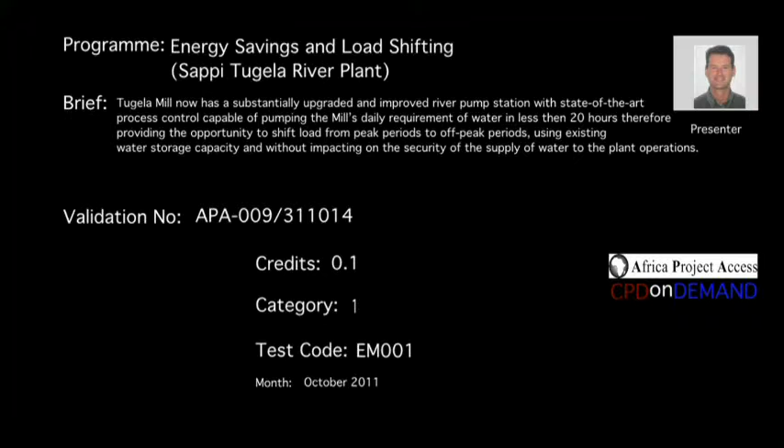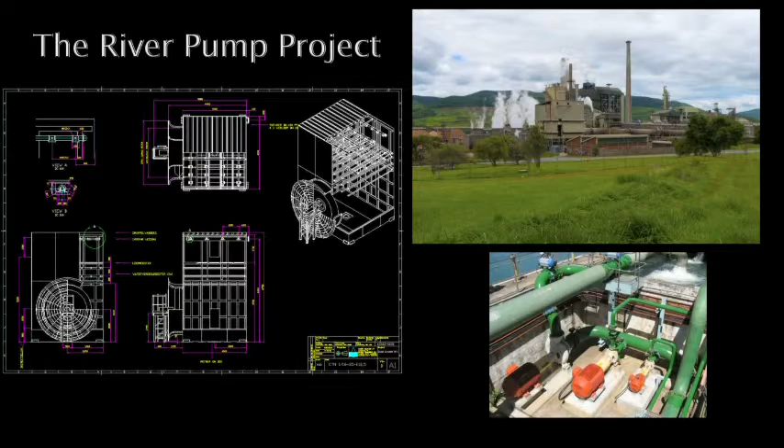We call it internally the River Pumps Project. This pumping station supplies water to Sappi Tugela's mill - it's the lifeblood of the mill. So every time we were messing around with this plant, it was obviously very risky and a lot of pressure on us to make sure we didn't bring the mill down.

I'm going to go through the project beginnings, how it started, the investigation, the process. I'm going to try and explain how the plant works. It's not that complicated, and I think it's a bit more interesting if you understand the plant, and then the detailed investigation procedures, and then our findings and solution.

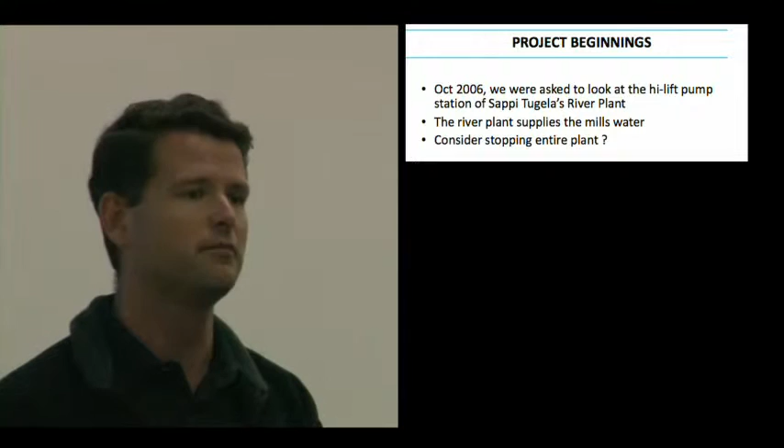The project started in October 2006. We were asked to look at the high-lift pump station at Sappi's Tugela mill, a river pump plant. The mill at that stage was thinking about upgrading the impeller on one of their high-lift pumps. So that's where we started off, and we walked into this plant with that idea in mind.

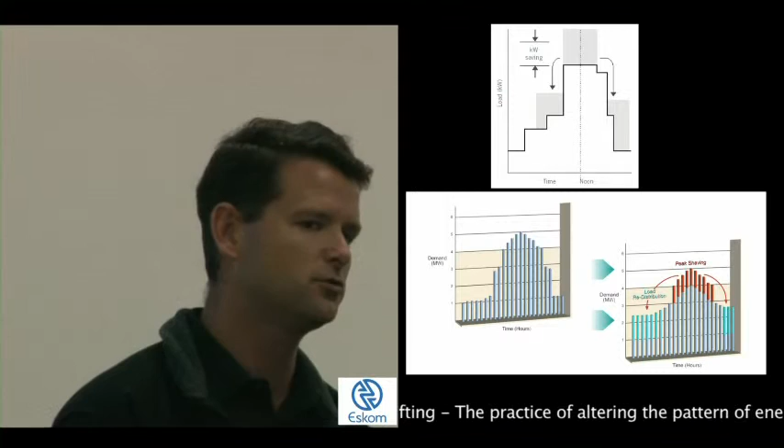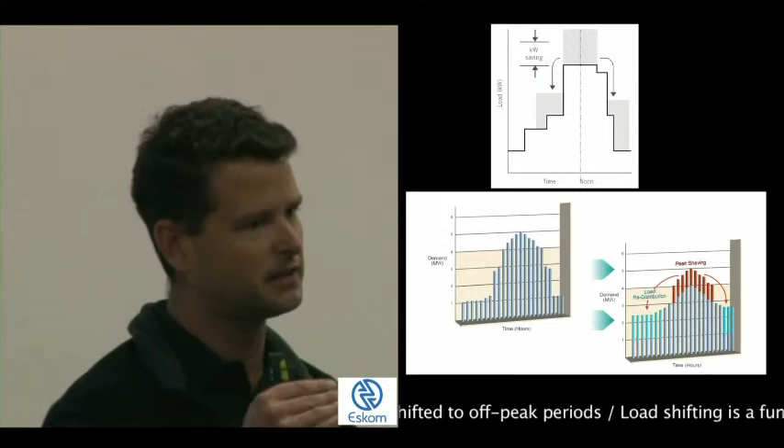One person suggested - and just to go back a bit - Eskom had all this load shedding issues floating around, and Eskom was funding load shifting projects. For those who don't know, load shifting is when you switch off a plant during peak periods of the day so that you can counteract the peak on the grid. That's because everyone goes home and switches on their stoves and geysers, and Eskom has this peak they struggle to handle. So the idea is to switch off plants during that period to counteract that grid peak, and Eskom was funding those type of projects quite heavily and pushing for them.

But anyway, we proceeded. We went to meet the personnel in the plant. The first thing I got told: there's no ways you can stop this plant running 24 hours a day, flat out. The water quality changes overnight - there's no way of knowing what's going to happen. The turbidity suddenly can go as high as 10,000 NTU. You can't process it, we can't keep up with the mill, we struggle. You can't stop the plant.

We proceeded anyway. Started gathering production data, power consumption data, equipment data, capacities. We even did a GPS survey of the plant because physically it's laid out over a fair area, and there were no detailed drawings showing the heights of the various pieces of equipment. So we did a GPS survey to figure out static heads and pumping heads.

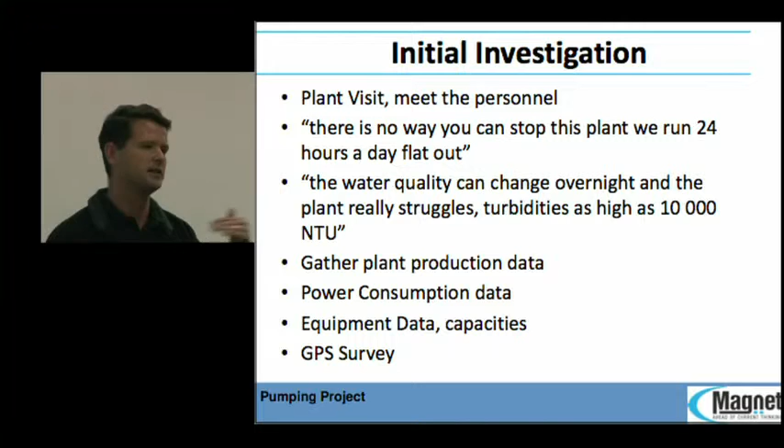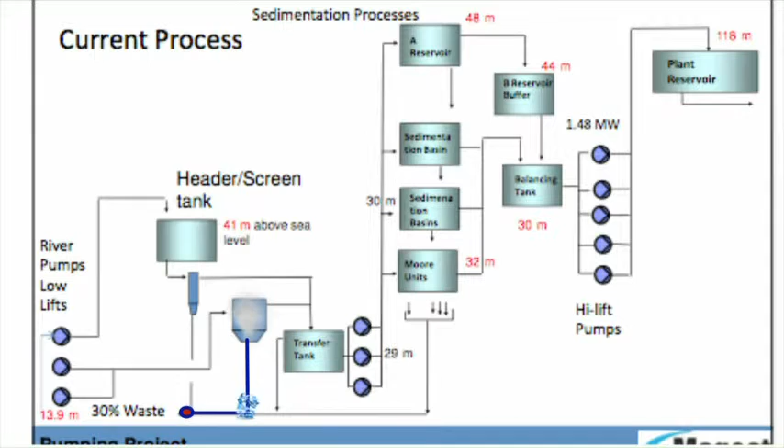This is the original plant configuration. Pumping from the river, about 3 parallel pumps up to a header tank that goes down by gravity to some cyclones, separating out the heavy waste that comes from the river - obviously there's a lot of stone and grit and stuff that has to be removed. The accepts from that go into a transfer tank, and parallel to that there was another what they call a grit chamber.

Then they process the water through the rest of the plant, going through basically sedimentation processes, where in principle you're just allowing the dirt to settle out and the accepts overflow and proceed forward through the process, then it gets pumped up to the mill. Looking at the static heads, we're starting at sort of 13.9 meters above sea level, up to 40 meters, and up to 118 meters above the plant, up at the mill.

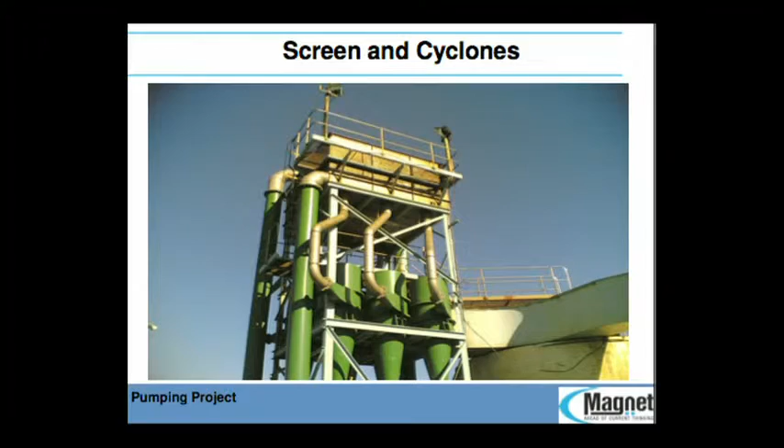In picture form, this is suction from the river. Those are the 3 pumps drawing from the river up to this chamber on top, which is like a header tank. These are the cyclones. There's what's their own homegrown centripetal grit chamber - they made this themselves because they didn't feel like buying it from anyone, so they designed that themselves.

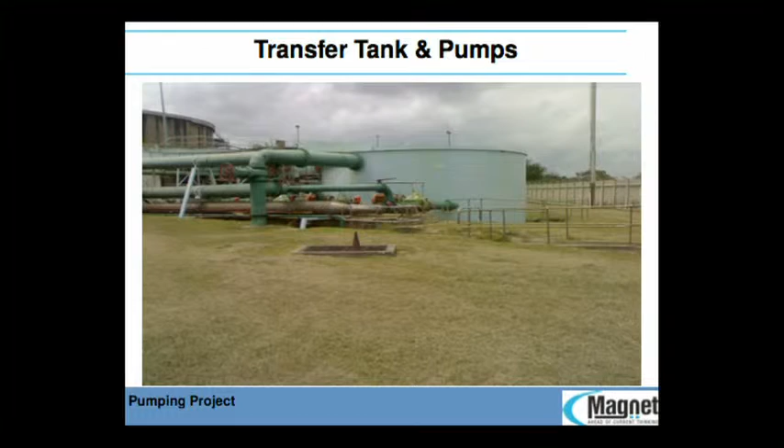There's the transfer tank, 3 original pumps in parallel. Here's the sedimentation basins - that's got the highest throughput of all the various sedimentation processes they've got there, at plant level, there's 2 of those. These are what they call the Moore units or clarifiers. What historically happened with this plant is they started off with the sedimentation basins, then they needed a bit more capacity, so they added something else, and every time they added something else, the technology had changed, so we were adding a different piece of equipment.

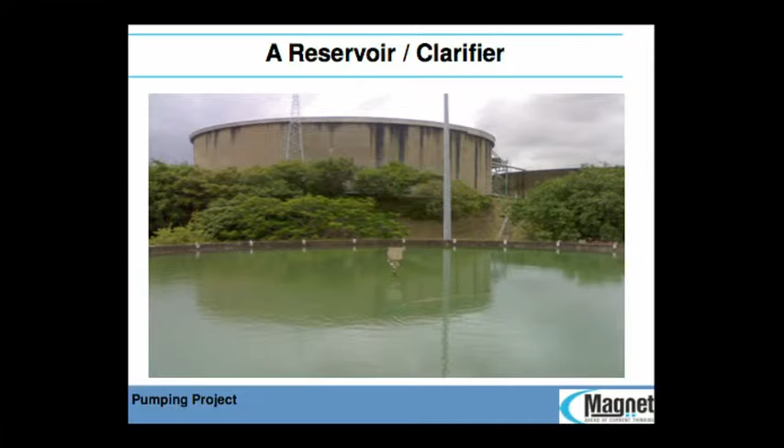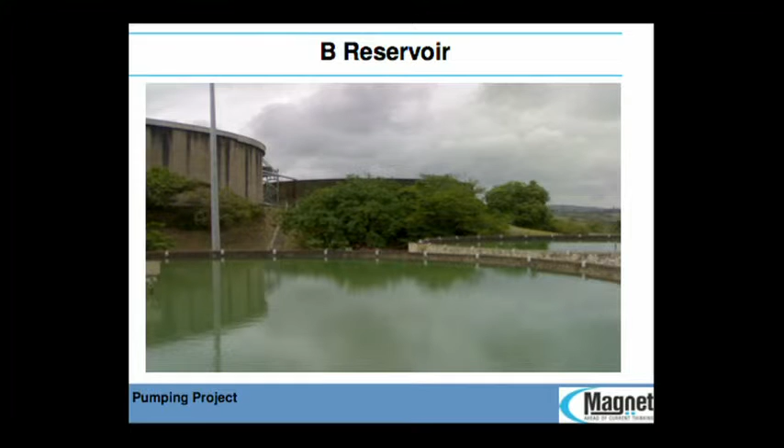And then that's the A reservoir or clarifier, which is a typical, more modern design clarifier. It overflowed from the clarifier to what they call the B reservoir. I think when they did the original project, they put in another big reservoir which could be converted to a clarifier in the future, and that B reservoir was a key part of this whole project - we were quite lucky that it was there.

From all those sedimentation processes, all the clean water flows into their balancing tanks, and then it's pumped by these 5 parallel pumps up to the mill reservoir.

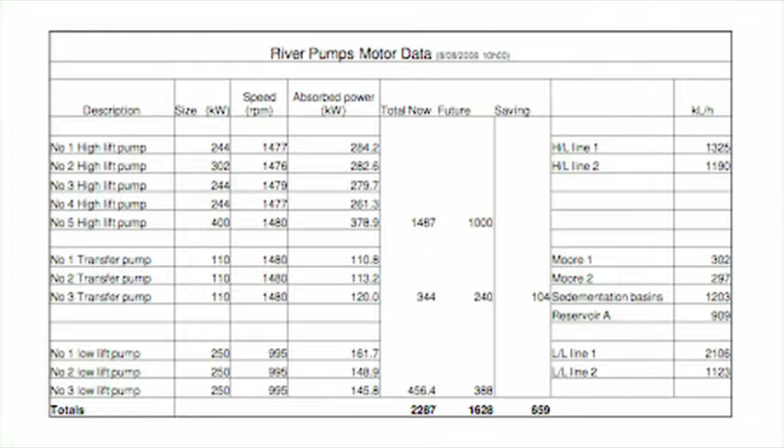This pumping section draws about 1.48 or 1.5 megawatts of power. The whole plant runs at about 2.2 megawatts.

One of the really nice things about this plant is, Gordon was talking about defining your scope and area of analysis. It was obviously quite easy for us because we had this whole pumping station that's supplying the mill. They had already online monitoring for the power being used in this plant, and it was very stable at around 2.2 megawatts.

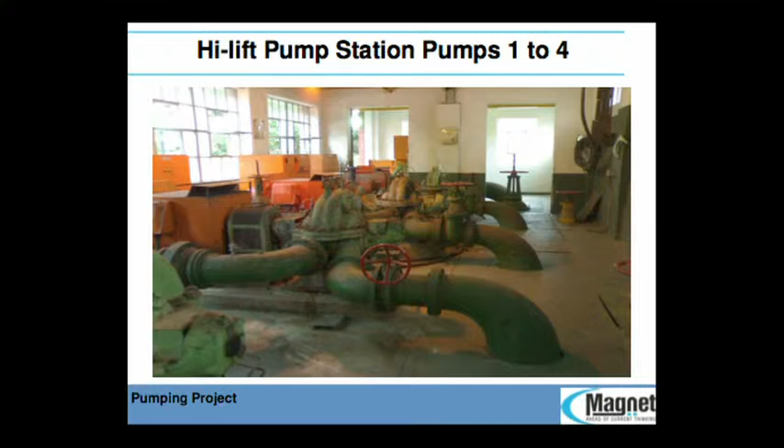That's the high lift pump station. These are the original pumps that I think were installed in the 1960s sort of area. And then they had one newer pump, a Sulzer pump, that's actually a 400 kilowatt motor, 6.6 kV. That pump has got a much larger capacity than those other 4 pumps, individual pumps.

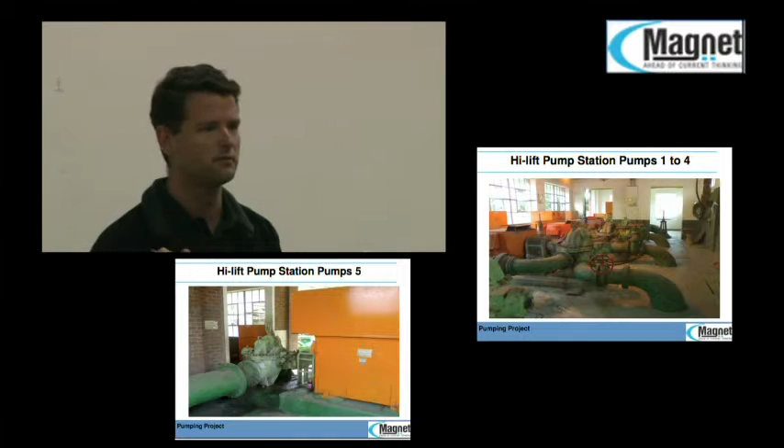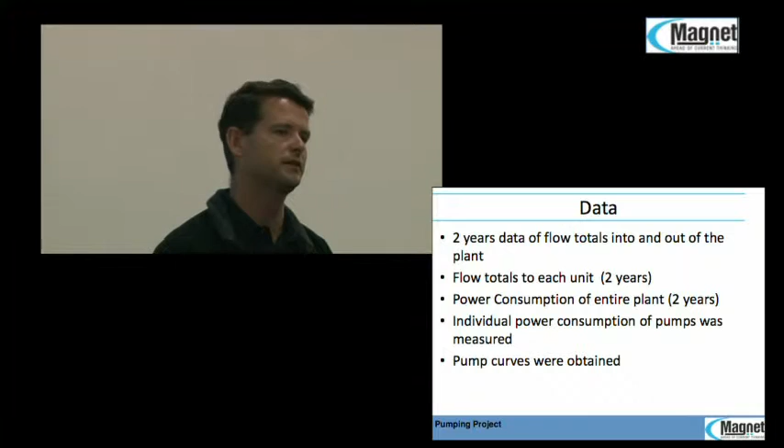What data did we collect? We got 2 years of data, flow totals into and out of the plant. We had a whole lot of log sheets from the plant personnel, recorded daily, and it actually was very useful to get that data.

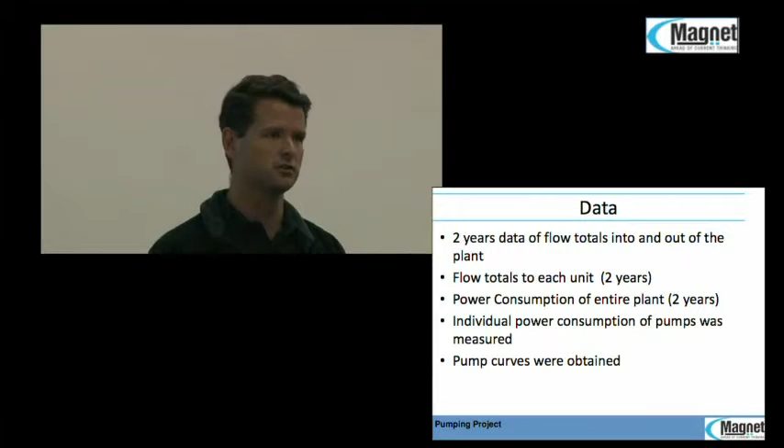We inputted that into a whole spreadsheet system, so you can analyze trends at different times of the year. How much water are they processing when the river turbidity changes? How does the river turbidity change? You've got these mental pictures of overnight it's shooting up, and then the next day it's fine, and all these sort of things. Flow totals into each unit.

We obviously, in the back of our mind, we're thinking about, if we switch this plant off, can we now catch up once we've been off for 2 hours and supply the mill? One of the key parts of this project is you've got this plant reservoir that supplies the mill. So the whole idea is that if you can stop this plant, have you got enough storage capacity over there to keep supplying the mill while you stop the plant, and then you've got to catch up.

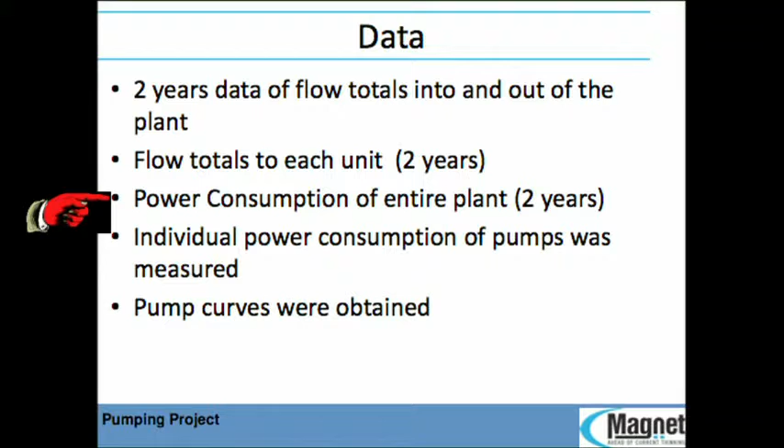So we've got flow totals for 2 years. We started looking at the power consumption of the entire plant. How does it change? Then you start getting more detailed individual power consumption of each of the pumps. Get all the pump curves, dig those out.

Did a mass balance across the whole plant for different scenarios. When the water's dirty, how much water can you put through each of the processes? When the river water is clean, and then effectively it boils down to, in summer, how much can you process in winter, and what's the average?

So what did we find, to summarize? Plant produces about 600 liters of clean water every second to supply the mill. On average, 30% of that water was returned to the river, irrespective of the time of the year.

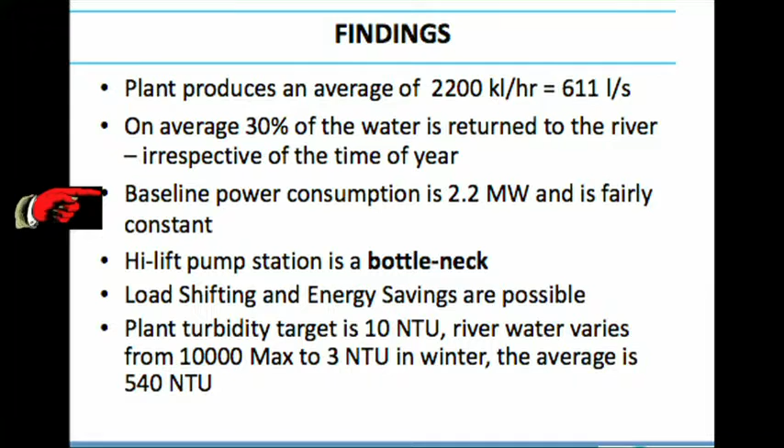Baseline power consumption was 2.2 megawatts, and it was very constant, which was great from an M&V perspective, because now you're starting with something constant.

The high lift pump station was a bottleneck, so if we wanted to stop the plant, we did not have enough pumping capacity to catch up in the 2 hours that we wanted to stop, and maybe even the 4 hours, because peak periods are from 7 to 10 in the morning and from 6 to 8 at night, when you're suddenly paying sort of double for your electricity. So it's very cost effective to stop if you can during those periods.

The load shifting and energy savings were possible, and I'll go into that in more detail. One of the key sort of scary factors of this is, if you're stopping this plant, how much can you process once you catch up, and what's the river plant turbidity doing?

Now, the target of turbidity for the plant pumping out to the mill and to various other users was 10 NTU. The river water varied from 10,000 at the peak worst summer flood situation down to 3 in winter. So suddenly you see, now when you start looking at those trends, you say, well, in winter we've got a turbidity of 3 from the river. You literally don't even need the plant in winter.

You can pump it straight up to the mill. That's how clean it's coming out of the river. The average was 540. So now you start getting a feeling for, well, you're actually operating in an average region far less than the scary 10,000 numbers that they're quoting to you.

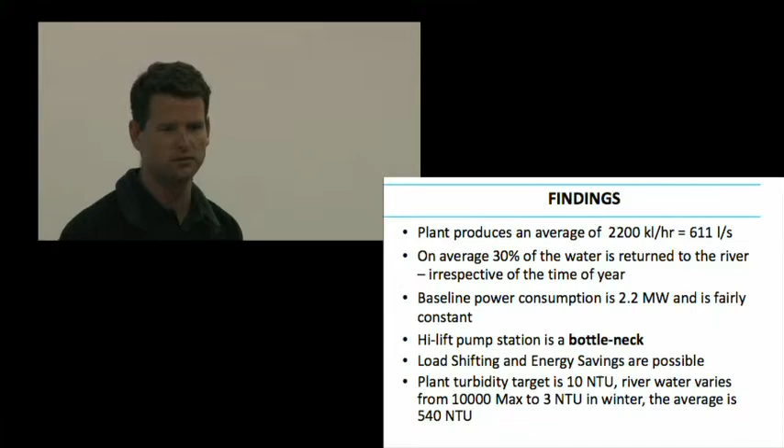It gets more complicated, like all projects, when you start digging into it. The high lift pumps actually supplied quite a few consumers.

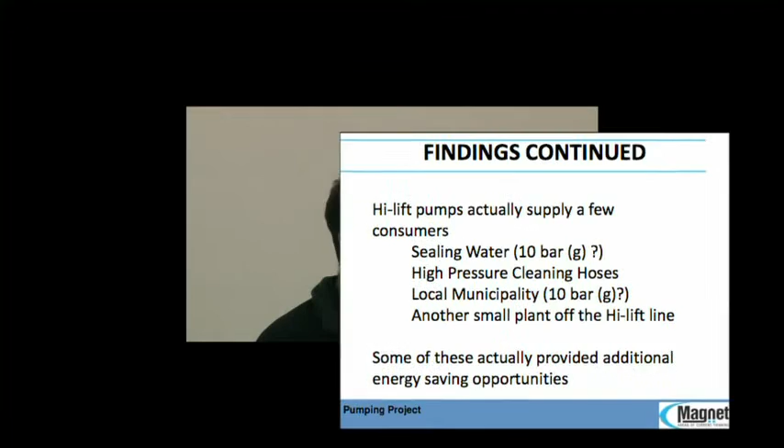After a while in the plant, we started talking, and I suddenly realized, wait a minute, where's the sealing water pump? Actually, the high lift pumps, which are supplying the mill at about 100 meter head to get up to the mill reservoir, were also supplying sealing water to all the pumps in the plant. So now they had 10 bar sealing water.

First thing is that there's obviously an energy saving opportunity here, because you don't need 10 bar water for sealing. But also, if you switch off your high lift pumps and you're not switching off the rest of the plant, you've got no sealing water.

They also used the high pressure, 10 bar water from the high lift station for cleaning. So now if you switch off the high lift pump station, you've got no cleaning water.

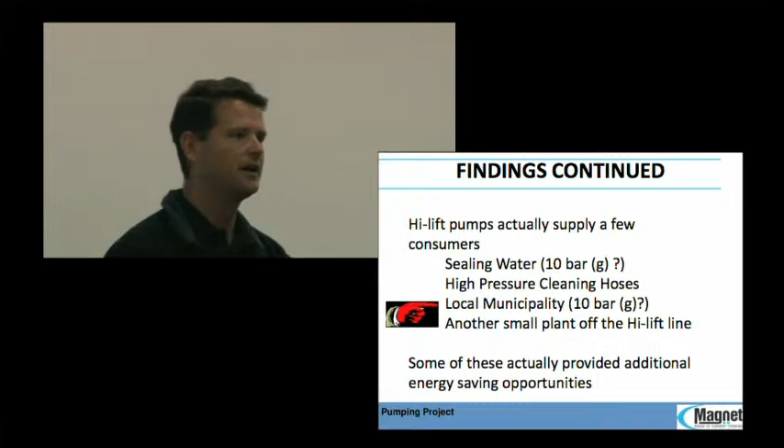They also supplied the local municipality with 10 bar water. And when I say the local municipality, this is like a little water processing station that then pumped across the river, and it was situated about 5 meters above the plant next to it. So you've got 100 meter head water supplying a back pressure of half a bar.

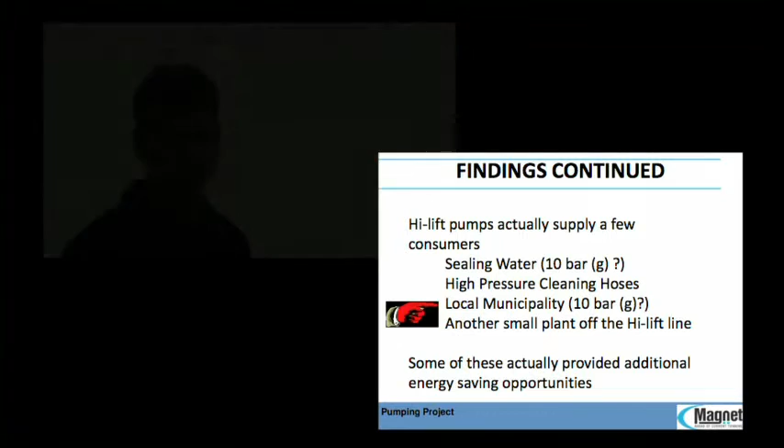The final complication that caught me up right before I was about to implement the project and get going was that I discovered there was another small plant right next to the mill that was drawing off the line supplying the mill reservoir, and that was a separate production entity altogether. So if we stopped pumping into the mill reservoir, they wouldn't be getting any water, and I'd literally be bringing down another plant.

And that was sort of mentioned to me as an afterthought right at the end. Oh, by the way, they're also drawing off the high lift line. So it gave me quite a fright.

But now all of these situations, this project's a little bit more interesting than just purely energy efficiency, because now you're juggling load shifting and energy efficiency, and what you have to do here to enable load shifting is often also an energy efficiency opportunity.

And it was actually quite complicated getting funding out of Eskom, because differentiating what's load shifting and what's energy efficiency is quite tricky.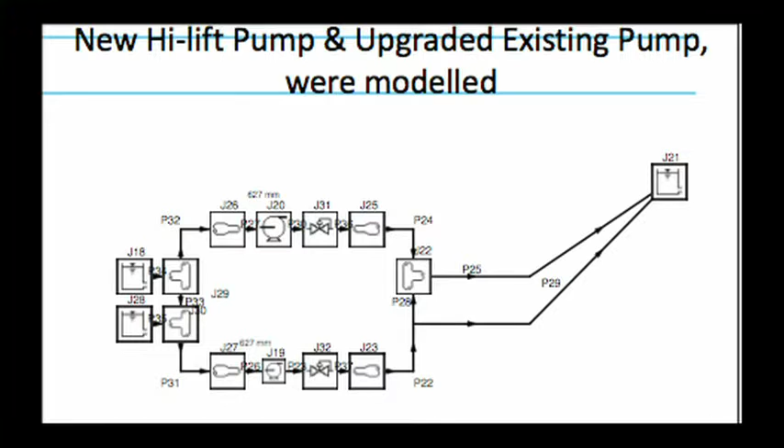We sort of predicted that in future, if we were to upgrade the one high lift pump and install a new one in parallel to it, we could maybe get that down to 1 megawatt pumping power.

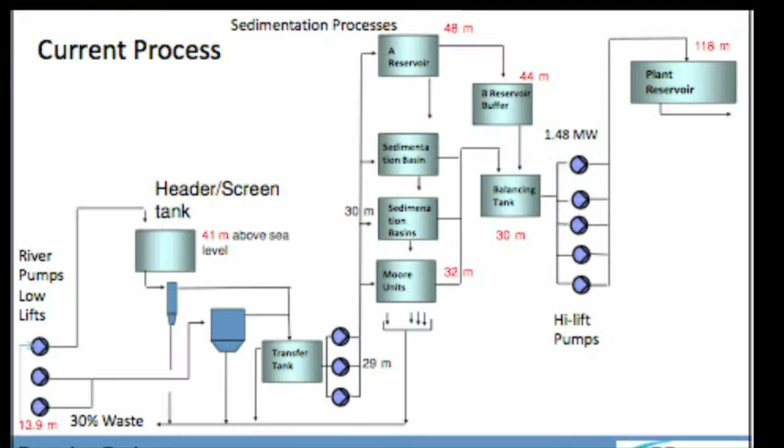The transfer pumps were also supplying this classic situation of pumping up to the A reservoir clarifier on the hill, 15 meters up, and the rest of the plants at the same level. So there was an opportunity there for energy savings.

And then on the low lift pumps, there was some opportunity, because they were overflowing and wasting water all the time. On the high lift pump station, we did a whole flow investigation and power survey, and then we modeled that whole high lift pump station.

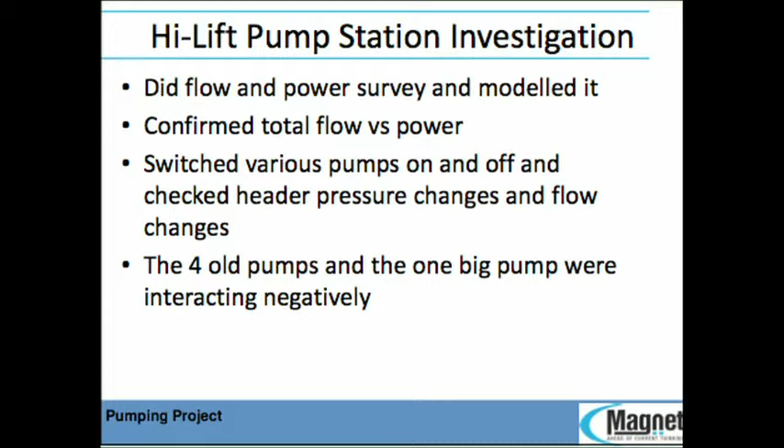And I think I kept on going because I was just so amazed at how bad it was. I couldn't really believe the figures. So we confirmed the total flow versus power.

We switched various pumps off and watched how the flow changed. And then typically in any parallel situation, every time you switch on an extra pump, you get less and less gain for a whole lot of extra power.

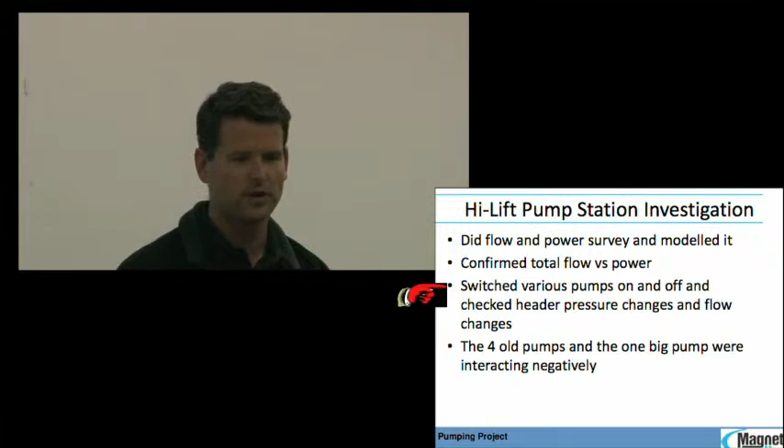And not surprisingly, the 4 old pumps were interacting negatively with the one big pump to a dramatic extent. In fact, the last pump they were switching on was doing something, but very little. And of course, those old pumps had different sized impellers and were throttled on the discharge to different extents, because if they didn't throttle it, it would trip.

So this is what we finally went for. We modeled one new pump to match the existing big silver pump. Upgrade this one so that they're both the same size, 630 kilowatt motors instead of the existing 400 kilowatt motor. Control valves to control the mill reservoir level, because you can't be switching these things on and off too much.

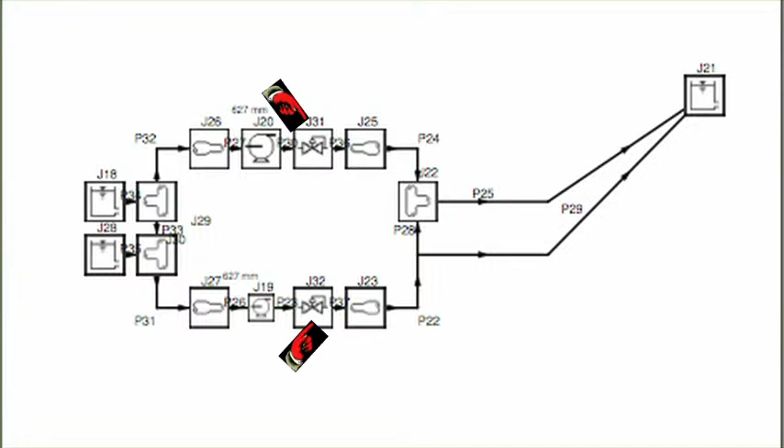We're really going to be aiming it twice a day. And we're going to put a mill telemetry system to monitor the mill level.

What they were previously doing is they were phoning up to the mill reservoir and they would say, well, what's the level? And the guy would say, oh, I'm at 95% now, so they'd switch one of the small pumps off. And a while later, they'd get a phone call and they'd switch another pump on, and they'd just play with switching the smaller pumps on and off.

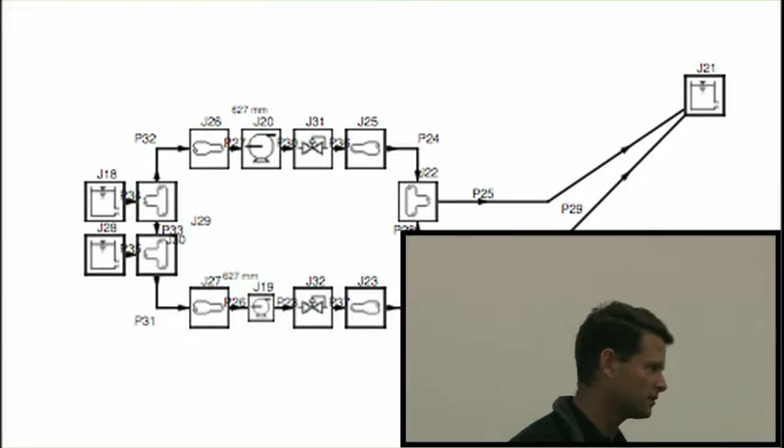So on the high lift pumps, the existing pumps were sitting at about, we thought, 70% efficiency on pumps 1 to 4. The bigger, more efficient pump was sitting at a theoretical 86% efficiency.

So one of the questions you've got to juggle now as well, in theory, you can upgrade the smaller pumps and put in bigger motors and do that whole analysis. Do you believe that they're going to be operating on their pump curves and that sort of stuff?

And fortunately, it worked out that it was more cost effective to put in a new, more efficient pump, because I was very wary of believing the existing pumps that were so old would actually give me the performance that their curves were telling me they would.

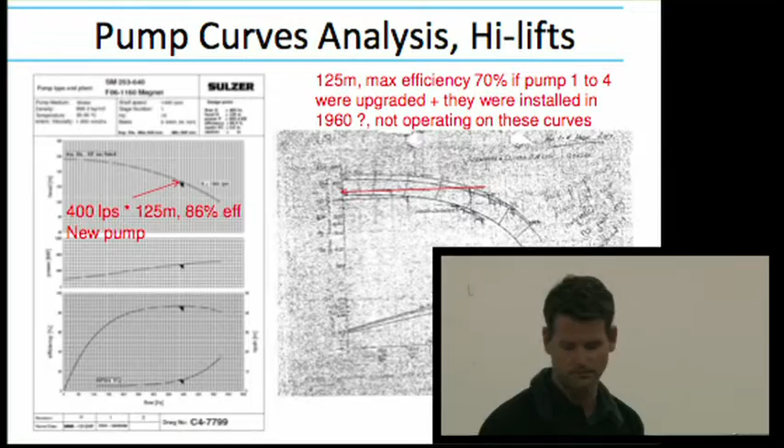First thing, we put in a telemetry system to transmit the mill reservoir level down to the control system. Well, we actually completely upgraded their whole existing control system to put in a new SCADA system.

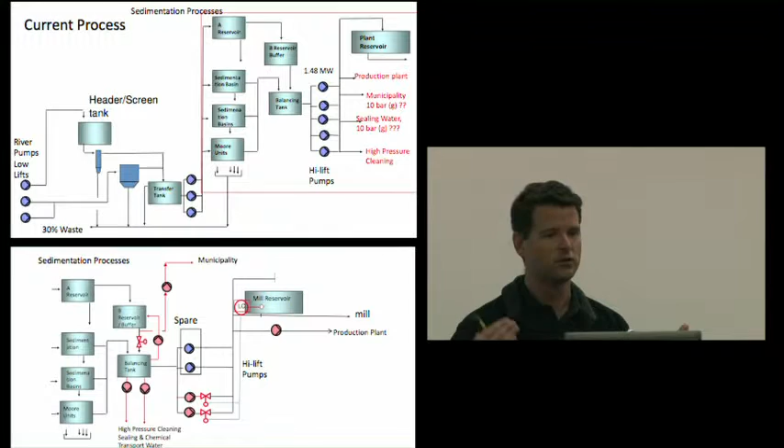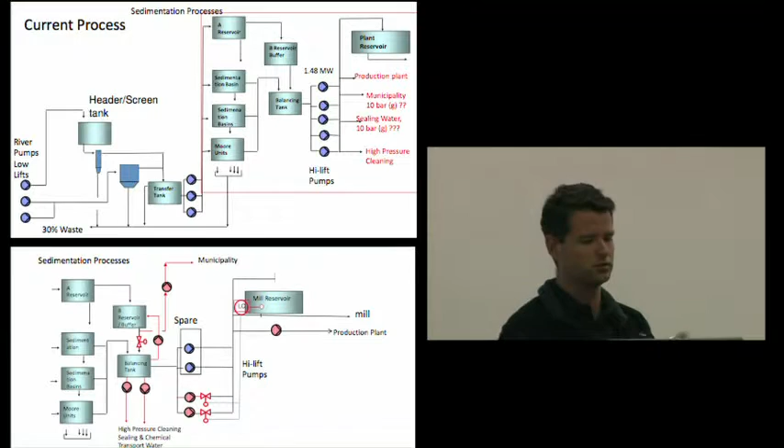One of the things they were scared of is that if you switch the plant off for 2 hours, then you come back online and something goes wrong, as will typically happen when you're starting up. Now you've lost reservoir level to play with, and you're waiting 2 hours to get an instrumentation guy out. So we put in a complete redundant SCADA control system, and we split the plant into streams so that if one analog card went out, the other two lines carried on running. That was another major change we made in the plant.

So as I said, we upgraded one pump and put one new pump in parallel to it. These two we kept as spare, and we demolished two to get the new pumps in. We put in a small pump using that high suction head on the B reservoir to supply the local municipality. This B reservoir was one of the key things, as I mentioned.

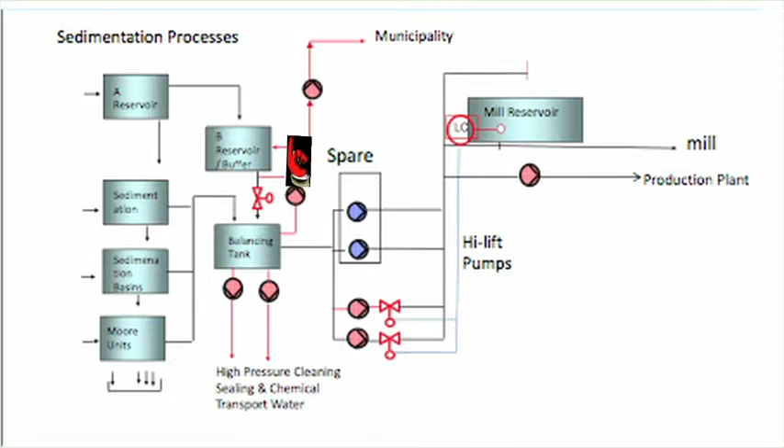So our idea was that if we switched this plant, the high lift pump station, off while the river water was really dirty, we would continue to produce clean water into this B reservoir, or buffer level. The sediment water coming from here would go into the balancing tank, and then, a bit counterintuitively, we'd pump from that reservoir up to the B reservoir, and then once we came back online, draw more quickly off that and catch up.

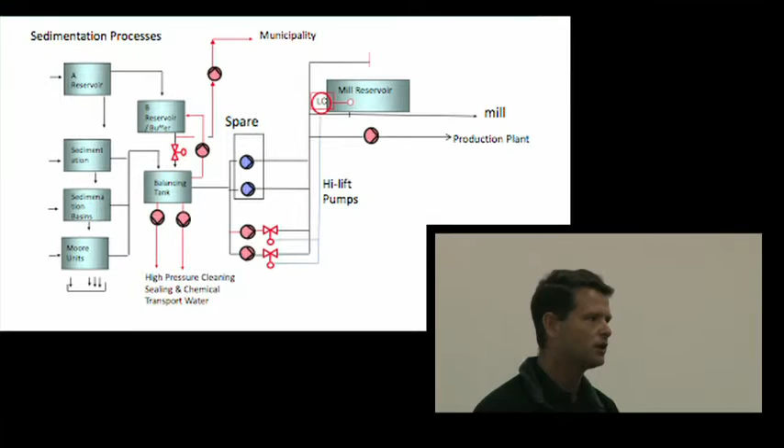That guaranteed me—the thing about this project is it's guaranteed. It's the DSM process, so you actually have to guarantee what you're going to do. We guaranteed a 1.85 megawatt load shift and 185 kilowatts energy saving, which changes the complexity of the project quite a lot. You have to be very, very sure about what you're doing, because if you don't achieve those guarantees, you're paying penalties. So by doing that, I was sure that every single day I could stop pumping the clean water for 2 hours and get about a 1.5 megawatt load shift as a minimum.

And on other days when the river water is clean, you can stop the whole plant and get up to 2.2 megawatts. Over and above that, in winter, I feel they should actually be shutting the plant down twice, but as you'll see, they're a little bit chicken.

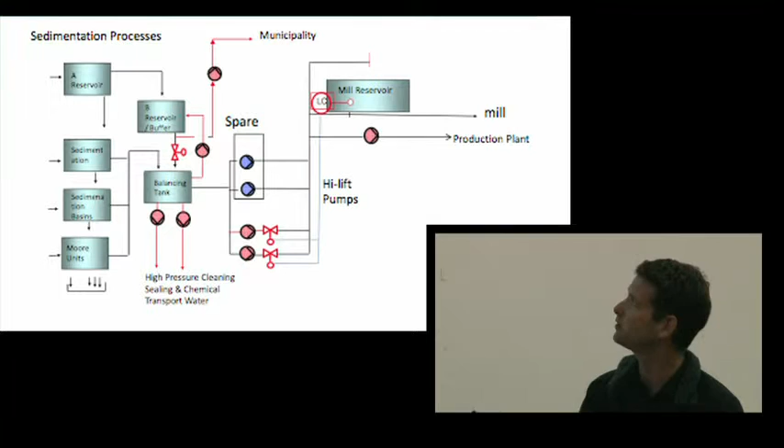Then this issue I mentioned—right at the end, just before we implemented the project, someone said to me, 'there's another production plant drawing off the main mill reservoir, so what do we do about that?' Now, the idea was, first of all, that they were struggling with their supply pressure, so I put in a very small booster pump to boost their supply pressure—literally a 2.2 kilowatt pump.

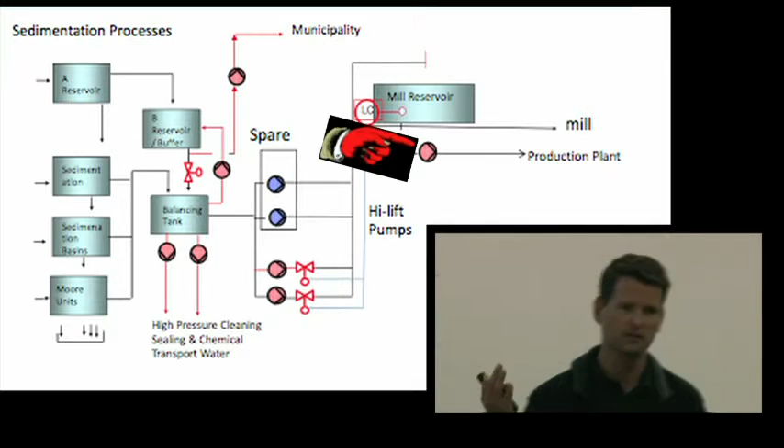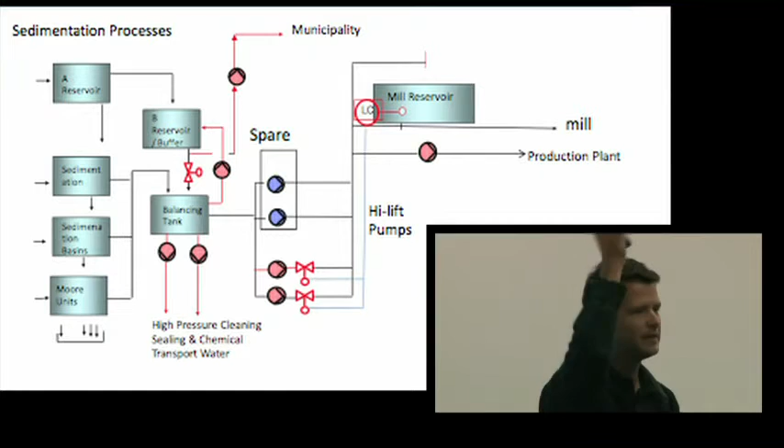But when we stopped pumping here, I modified the piping system so that we siphoned back off the mill reservoir to supply them, as opposed to pumping to them. Sounds like it should work, and the science said it should work, but the pipes go up above the reservoir, and there were leaks on them, and open air nozzles and things. So I had to do quite a few modifications there, and it was probably one of the things I was most worried about—whether the siphon would actually work. But after we put the pump in, I never heard a word from them again, so it seems to work.

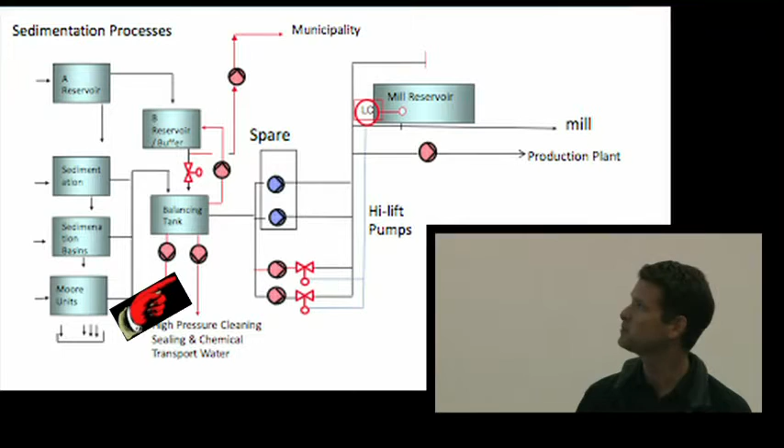As I mentioned, we had to put in a high pressure cleaning pump so that if we stop these pumps, they can do high pressure cleaning. We also had to put in a dedicated sealing water pump, which was also an energy saving, because now they got sealing water at 3 bar instead of 10 bar. But it actually, from a payback perspective, wasn't great from an energy efficiency standpoint.

We proposed this project in 2006, and at that stage the plant was saving around 700,000 Rand a year. Now they're saving 2.2 million Rand a year. So the whole payback scale has changed, but we proposed it to Eskom in 2006, and got approved at the end of 2006. The payback for all these modifications wasn't that great. It was really the load shift that was driving it, and Eskom was funding that 100%.

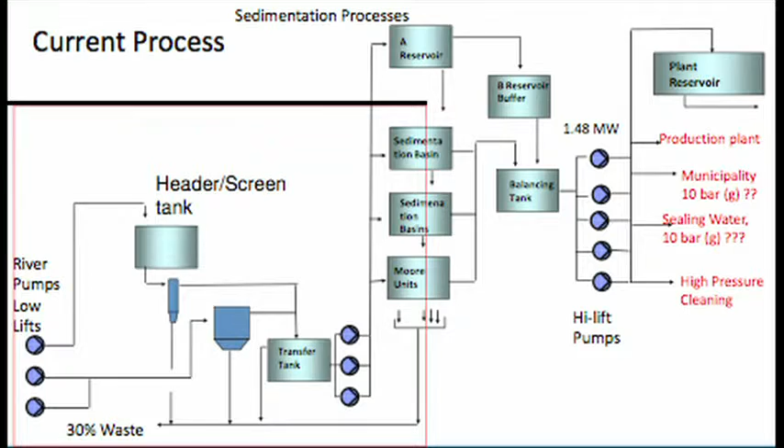What did we do on this section down here? We put in one new pump to supply that 15 meter back pressure or static head. We downgraded these two pumps, trimmed the impellers, and added one new pump. As you've probably noticed, we didn't put any variable speed drives onto this project, and it's, I guess, a bit of what Gunnar was talking about. Generally the major component of all your system curves is static head in this application, because you're pumping to a high head here, up to the mill.

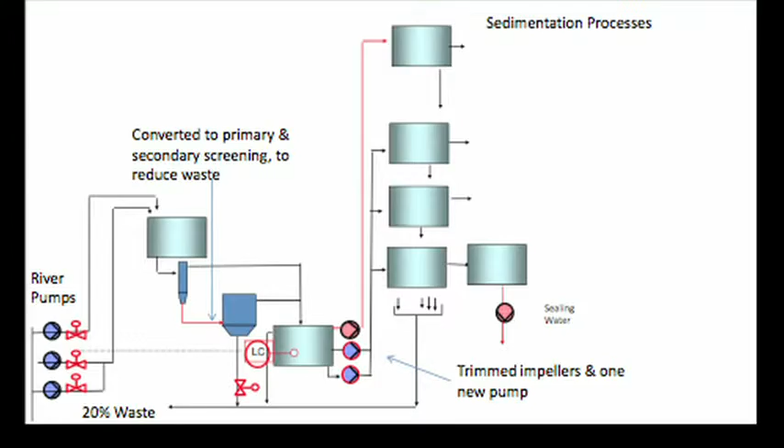Looking back at it now, with the cost of electricity being what it is now, you could probably justify variable speed drives in some places. We could have put a 630 kilowatt drive on the high lift pump station, and you would get a saving, but it's actually more cost effective for them to just stop pumping for longer instead.

And then you catch it up. So during the morning peak, when you'd stop for an hour, you've got a 3-hour morning peak. Instead of stopping for 2 hours, if you've got enough capacity, enough mill reservoir, you stop for 2.5 hours, and then catch up at maximum rates and maximum efficiency. So I still think not putting drives in was probably the right thing for them.

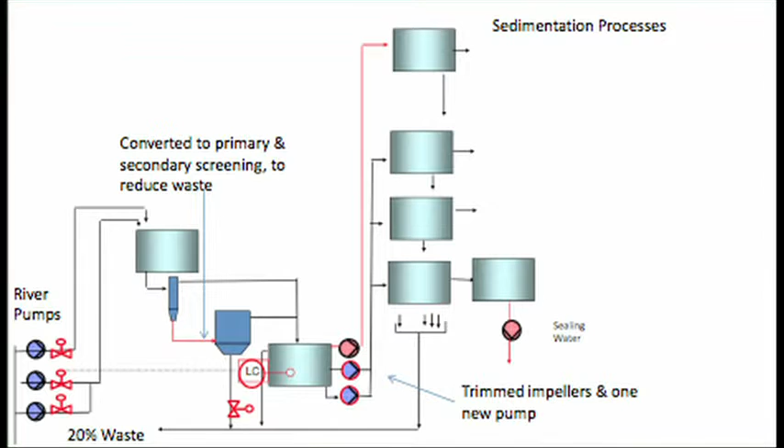Because of this waste situation, they were always dumping at a constant rate from this centripetal grit chamber. So I put in a full ball valve into that line so it didn't get blocked with all the slurry, stones and stuff coming out. Then I started controlling that waste water, and in winter we put it onto a pulse system where it only opens every few minutes, whereas previously they would just have it sort of 30% open. It was a knife gate valve, so they were worried about it blocking.

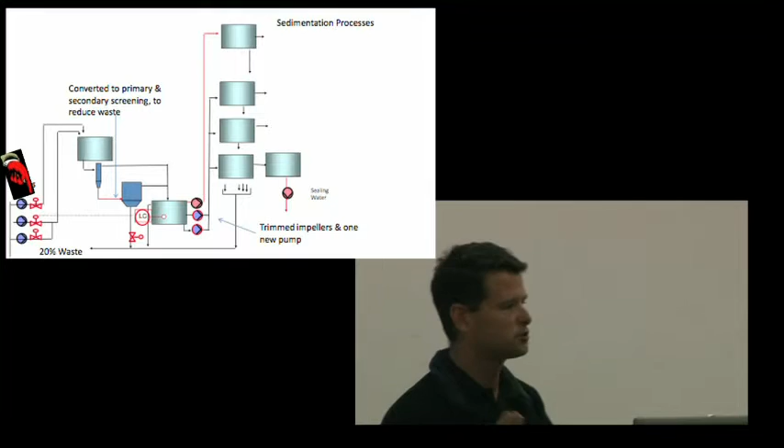And we put these control valves on here. That had two reasons. These pumps are drawing up from the river, so when you stop this whole plant, you've lost your prime on those pumps. Now you have to re-prime them, and it was a very manual process before. They had little Nash vacuum pumps priming the pumps, so we came up with a whole automated system of detecting when they're primed, and on-off valves so you can prime each pump individually and detect when the pumps are primed. That was another whole complication to switching this plant off.

They very rarely had to go and prime them before because they were just running all the time. So these valves also had an added function, in addition to controlling that level now instead of just overflowing it like previously: when the pumps stop, those valves close and you don't drain all this water out back into the river and lose more of a prime than you need to. Then if you start up, sometimes they actually literally open those valves to back flush it and speed up the priming process. So that's part of the P&ID where we've automated that, put the control valves in, and a flow switch to detect when the pumps are primed.

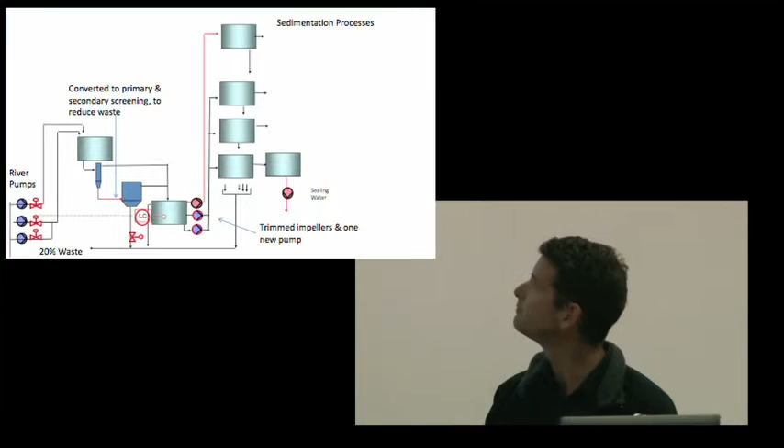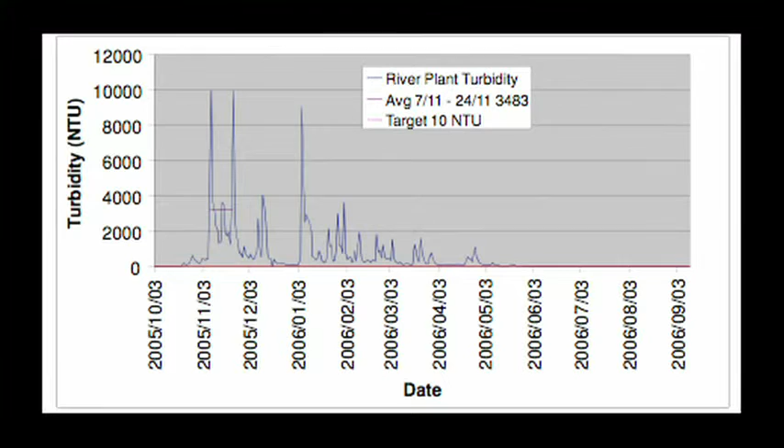This is the turbidity profile. I looked at this graph many times when I was struggling to sleep. You can see how the turbidity changes. They're talking there about 10,000 NTU, and that's the sort of nightmare scenario - the plant can't run, it struggles to keep up. But actually 10,000 NTU only occurred for very short periods, then it drops down dramatically. Look at this period here - for that whole period, you can virtually pump from the river directly up to the mill.

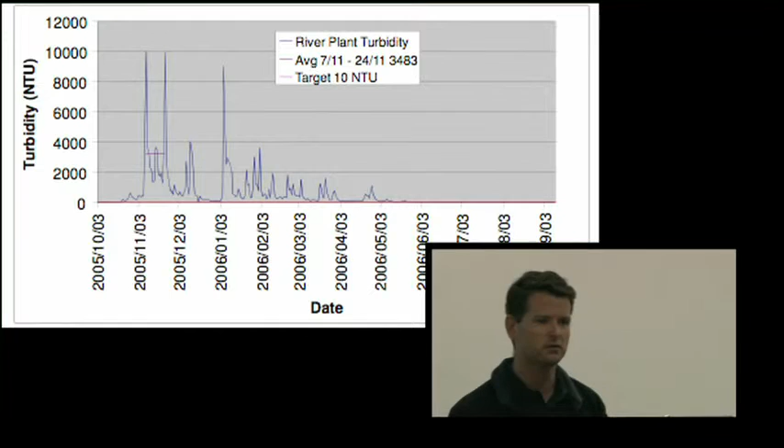So just broadly looking at the project, you can think: well, if they can keep up with the mill, and they don't literally bring the mill down, they're just struggling to maintain it, then you should be able to, for most of the time, switch off for 2 hours and catch up. That's the broad logic without doing all the detailed calculations which we did.

So what was the scope of work for load shifting?

We upgraded one of the high lift pumps to almost a full-size impeller, and put a 630 kilowatt motor on it. We replaced two of the existing high lift pumps with one big pump, as I said. We installed a new pump to supply the B reservoir, 132 kilowatt pump, a new high pressure cleaning pump, 110 kilowatts, new production supply pump, that was the small little one, that 2.2 kilowatts, but it was critical to the functioning of the whole project.

New pump to the municipality, 22 kilowatts, level control system, that whole cyclone configuration, control valves, complete new automation system, an upgrade of the Siemens SCADA control system.

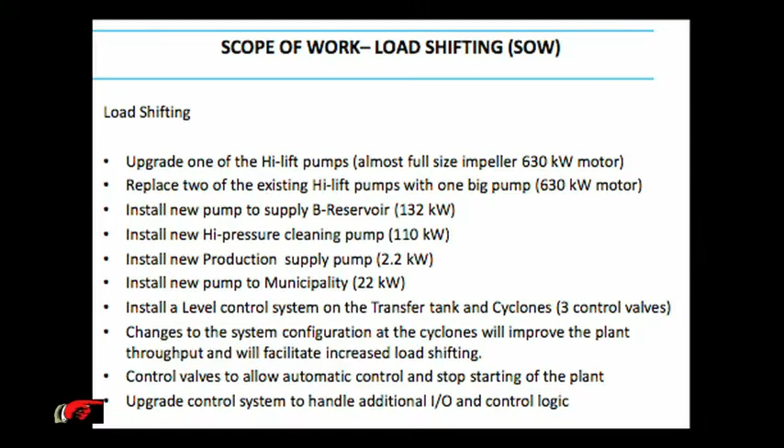On the energy efficiency side, we replaced one of the transfer pumps with a bigger 160 kilowatt pump, and we trimmed the impellers of the other two, and added a new sealing water pump.

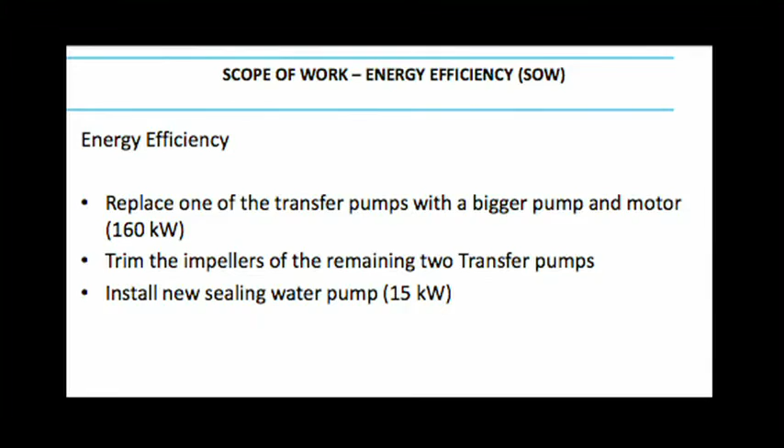From the M&V results, so now when you're doing a proper DSM project, you get the university team to come and verify it. Gershwin actually was initially arguing with me about what's load shifting and energy efficiency at the beginning of the project, and then he handed it over to someone else.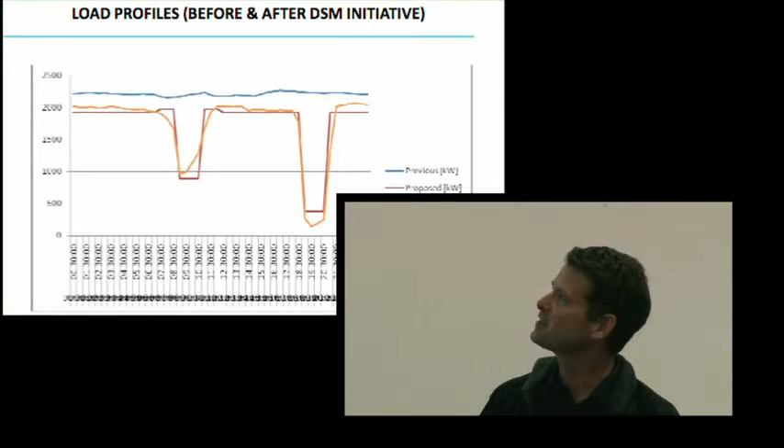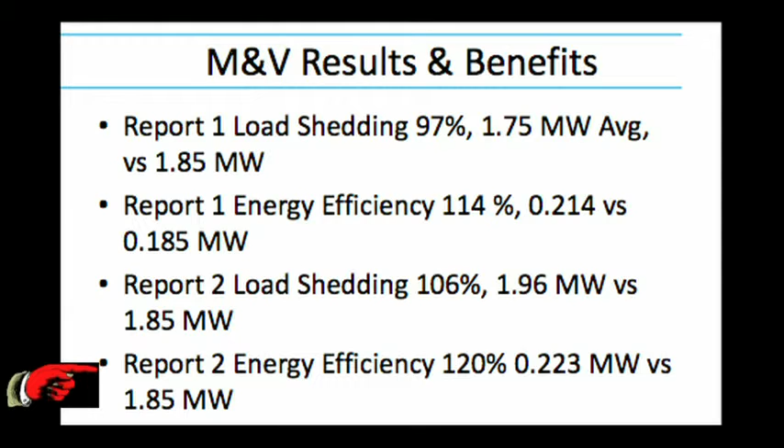So these are the M&V results. We guaranteed 1.85 megawatts, and you're allowed to be within 10% of that. So the first set of results we got 97%, and energy efficiency we overachieved. And the second results we did better, and better for the third results, and they've been running, even had just recently did another M&V set of results, and they were still fine.

So what are the benefits? Load shifting during both peak periods. Load shifting is extremely cost effective for a plant, and I'm looking at some refrigeration projects now where they've got ice dams and things like that.

Because your peak energy cost between 6 and 8, I think in winter, depending on your tariff, is about R1.50 to R1.80, and it's more than double what you're paying during normal periods. And even in summer, it's about double, but it's just a lower rate. So if you can move load from peak periods to off-peak periods, you can halve your costs. That's not even talking about the efficiency side of it, it's just when you're doing the work.

So this project was basically, I think I've given the numbers soon, it was a 9 million rand project roughly. It's not a very big project considering some of the other ones I've worked on in pulp and paper, but it was funded—the client only had to come up with about 2 million rand for the project, and they're getting now about a 2 million rand saving every year.

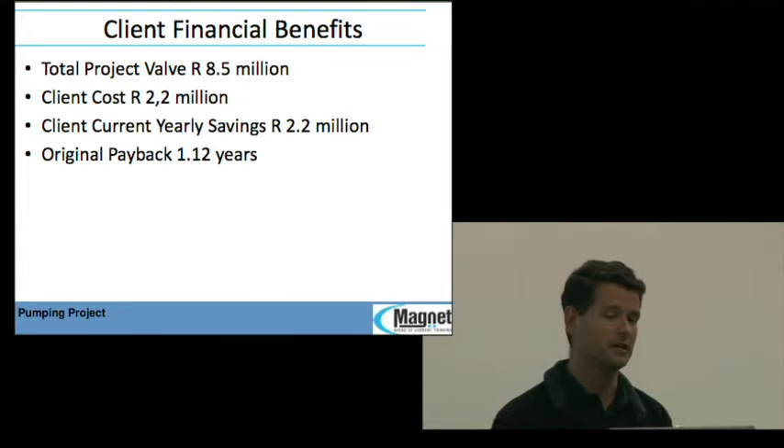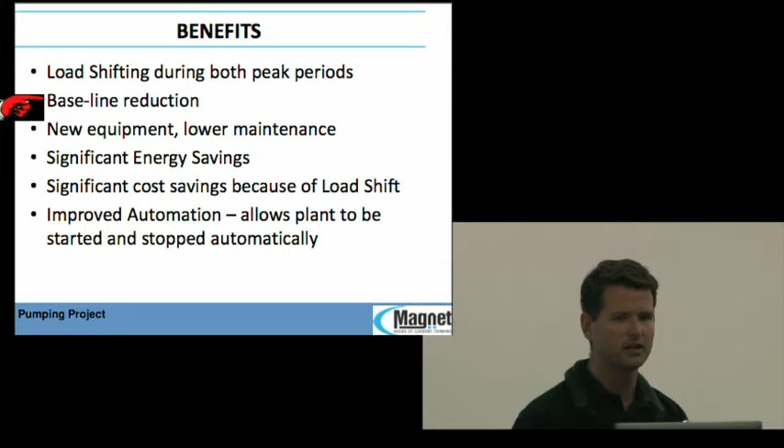There was a baseline reduction. That was one of the reasons Eskom also liked this project. When you do load shifting, you often create a new peak because you're pumping faster once you come back online. But as you could see from that profile, we dropped the overall load of the plant as well as doing load shifting, which created lots of arguments because they were saying, well, we were load clipping and things like that, but we got past that.

So there were significant energy savings. Overall, if you just look at the difference between the two profiles, it was about a 25% energy saving.

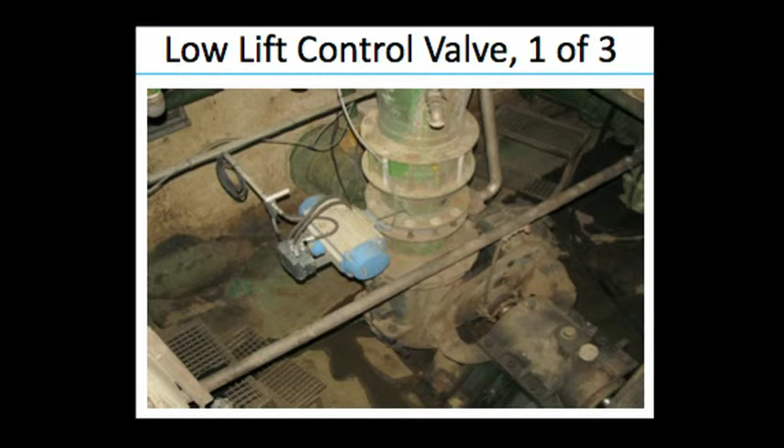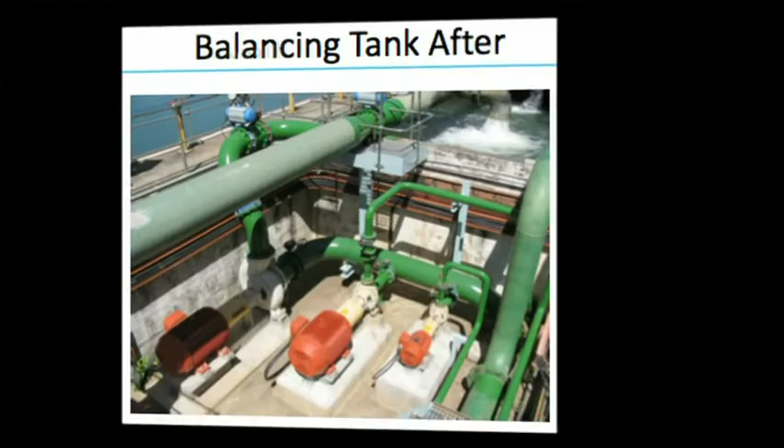Financial benefits, total project value 8.5 million rand. Client cost 2.2 million rand. So they got a massive investment into their plant. And yearly savings, they're doing 2.2 now. Original payback when we started the project was 1.1 years for them.

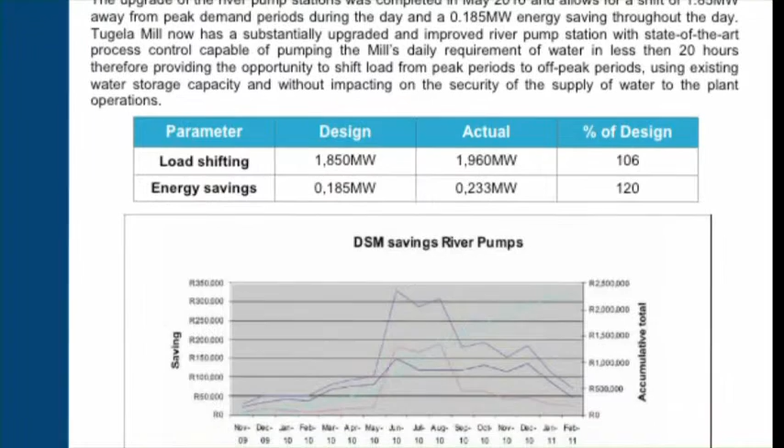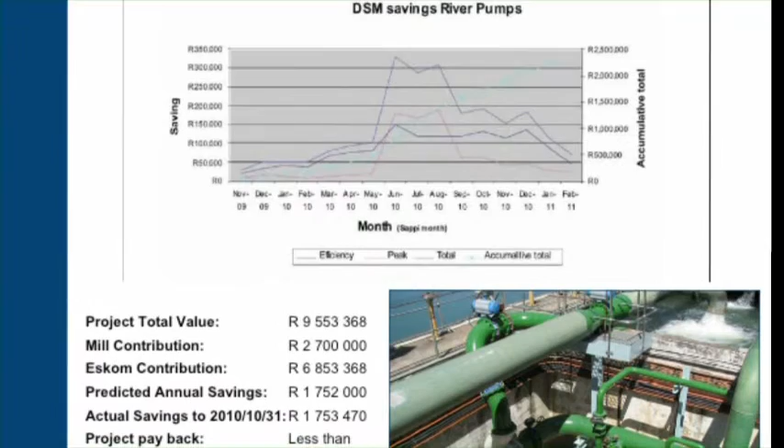Another interesting thing about DSM is that you're getting the clients, in most of our projects, as you're implementing a series of changes in the client's plant, production plant, they're getting savings as you're implementing, and then they start paying you back. So actually the effective payback is often a lot better than that 1.1 years because they hadn't spent that money yet. Eskom was funding the project and the client's paying us some sort of progress payments as we're going. So once we've implemented something, then they start paying some more, and so the effective payback was actually less than 1 year.

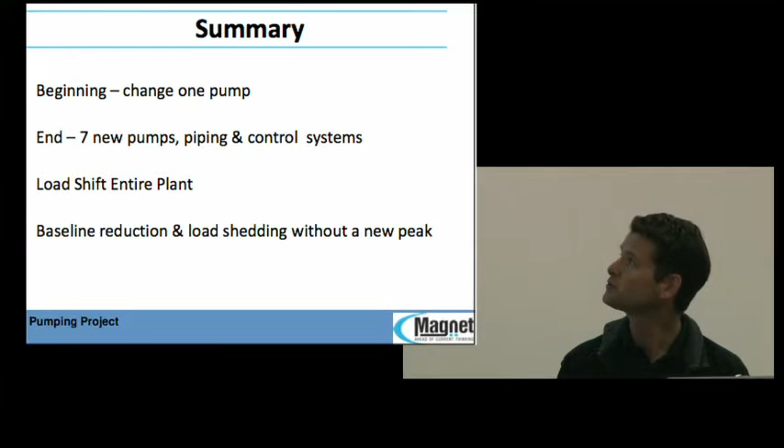So in summary, we thought we were going to change 1 pump. We ended up installing 7 new pumps, piping, control systems. We load shifted the entire plant, with baseline reduction and load shifting, load shedding without a new peak.